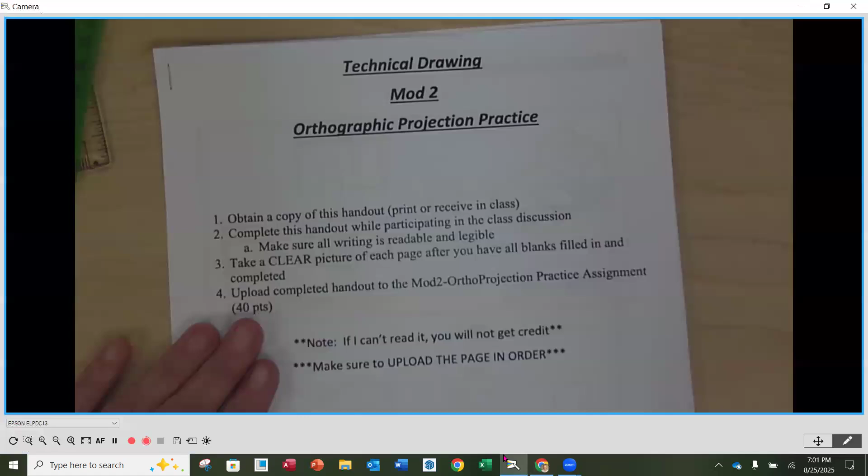So I've already printed the handout here for us. I'm going to go underneath our camera. I forget exactly how many pages it is, but I think it's like 6, 7, or 8 pages or so. Not all of it has work to do on it, don't worry. But we're going to go through and hit the highlights and make sure you know how to proceed and what's expected.

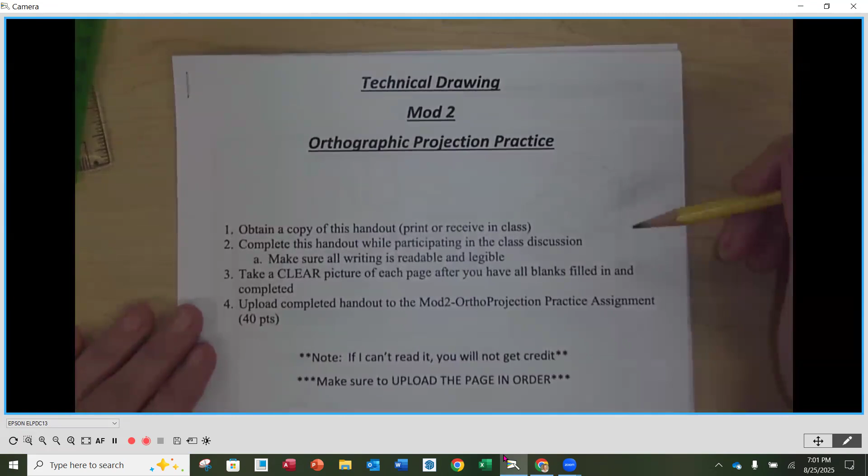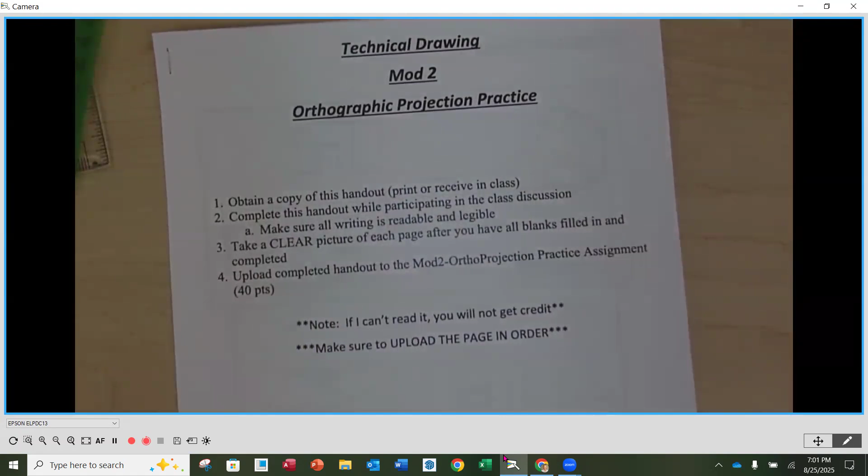So first of all, obtain a copy of this handout. Most of you have, otherwise print it out as needed. If you don't have a printer and you're virtual, once we get to the places here where you need to fill in information, you'll be able to identify it and then number for me. So if you're not here on campus and you don't get a copy, just make sure it's easy for me to follow and I know what you're answering and doing.

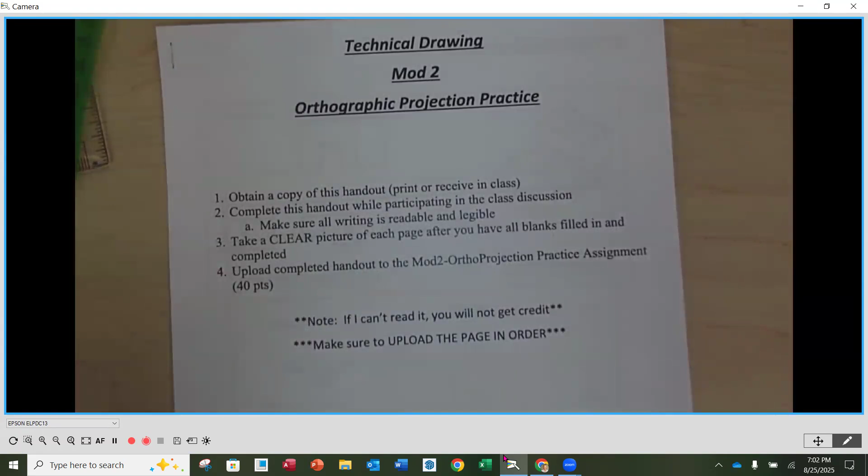When you hand this in, you are going to be uploading it to the assignment. It says here, take a clear picture of each page after you have all the blanks filled in and completed, and that's what you're going to upload. So whether you use a scanner device, a scanner app from your phone, a regular scanner, or you just take the pictures, you can do that, but you have to be directly above, kind of like a copier.

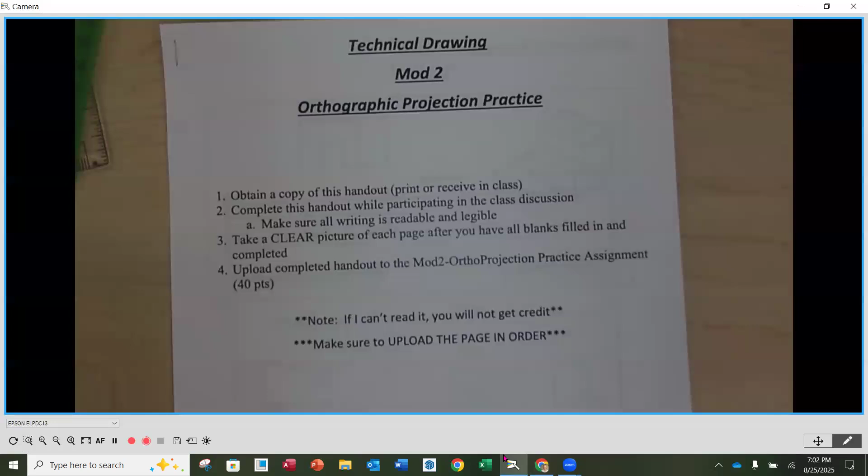You guys ever hand in like that? Okay, and make sure that your files are clear. If you go back and I pull them up and they're blurry because maybe you moved or the lighting wasn't good, I can't give you points. And then you're going to be burning a submission, so always check your files before you hand them in, just to be sure, because if I can't read it, I can't give you credit.

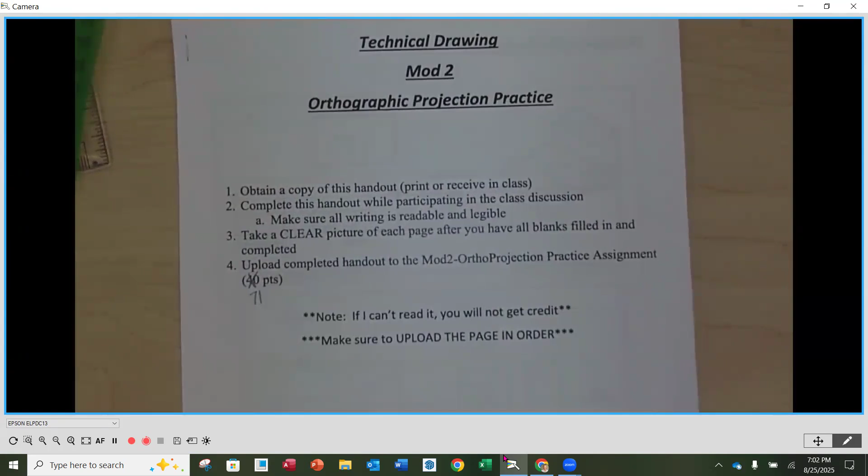And then you're going to upload it, and it's not 40 points, it's actually 71 points. I had it 40 to begin with, but I thought, you know what, it's kind of hard for me to grade that way. So I gave it 71, kind of 1 point for everything that you're going to be handing in.

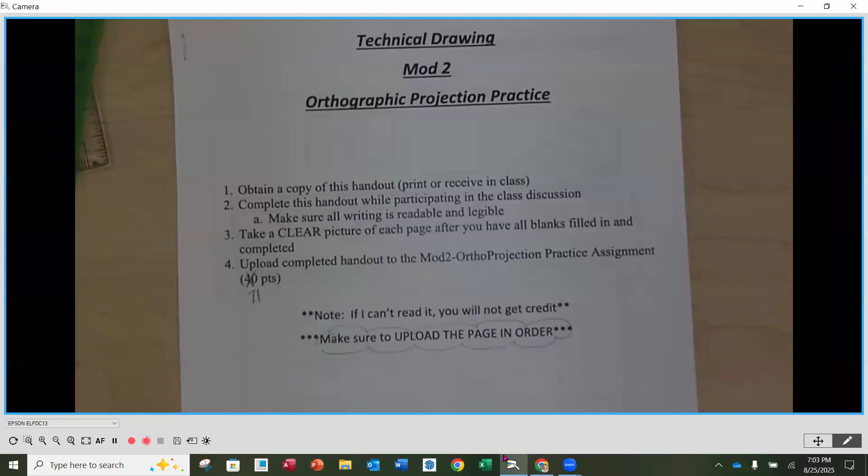The other thing that I appreciate is if you upload in order. If you take it apart and put it in all different orders, you know, if the first page is the last page and stuff like that, believe it or not, from my perspective, it's a pain to go through. So if you can put them in order, I would really appreciate it.

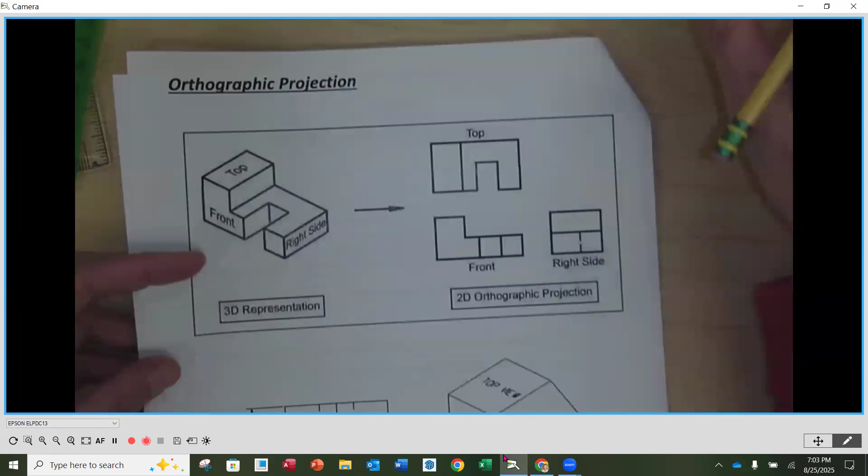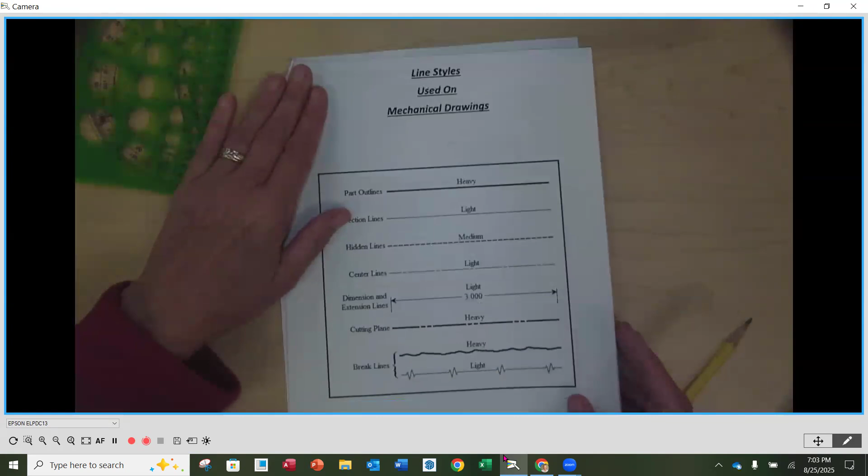Now the first couple of pages here are more reference than anything else. The first one is looking at a 3D representation of a simple part, and then you can see the top, front, and right side views in orthographic projection. Just a nice example. Same thing down here, just another example. This is also a review of the different types of line types found in mechanical drawings. That's for your reference.

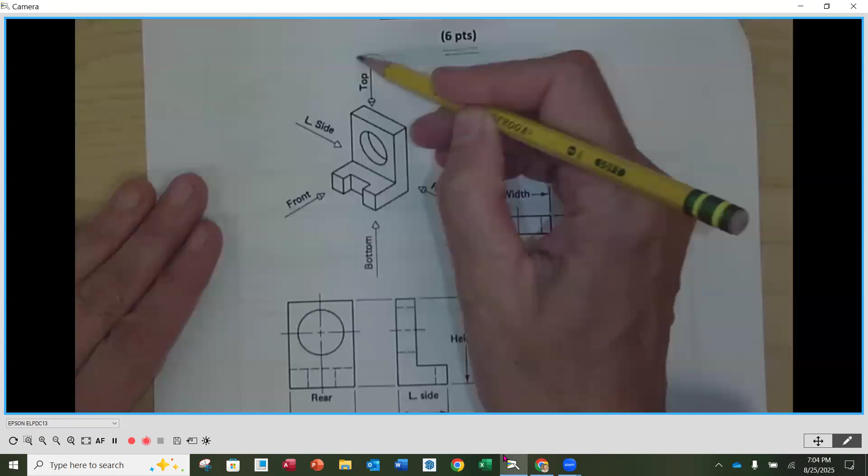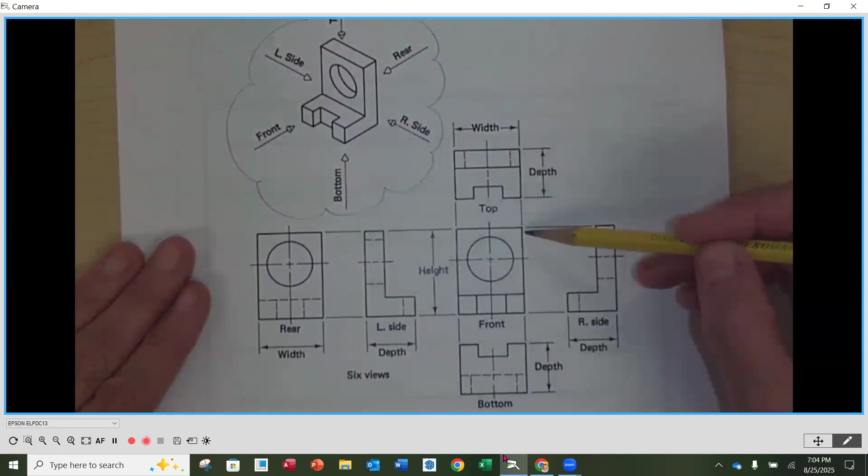And then when we turn the page one more time, this would be like the 4th page-ish. This is our first page where there's points you need to hand in to earn points. In this case, they are using the drawing that we see here. They're identifying the line of sight for the front view, the top, the right side, the left side, the bottom, and the rear. And then they've drawn in orthographic projection, unfolding that glass box around that part to show front view in projection with the top, bottom, right, left, and rear. Do you see how that's developed there?

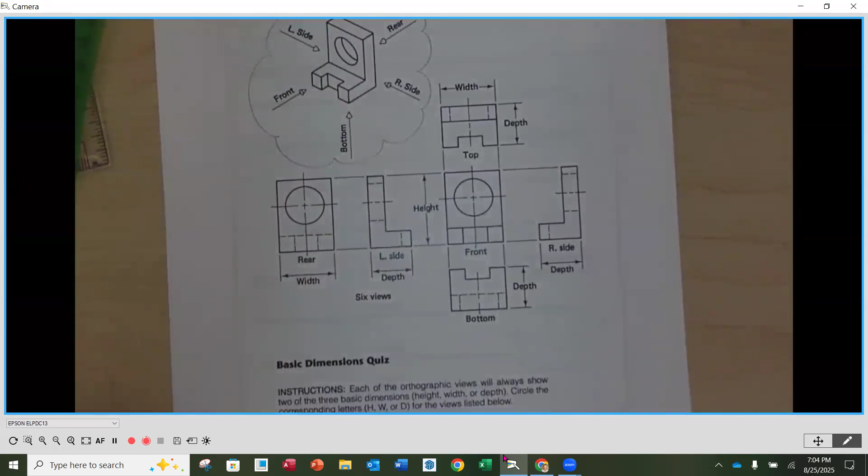Now what they want you to do is identify those 3 overall dimensions, height, width, and depth. As I said earlier, we can find them in 2 views. Each one of these views, 2 of those are going to be identified, not all 3, but 2. So what they want you to do is, at the bottom here...

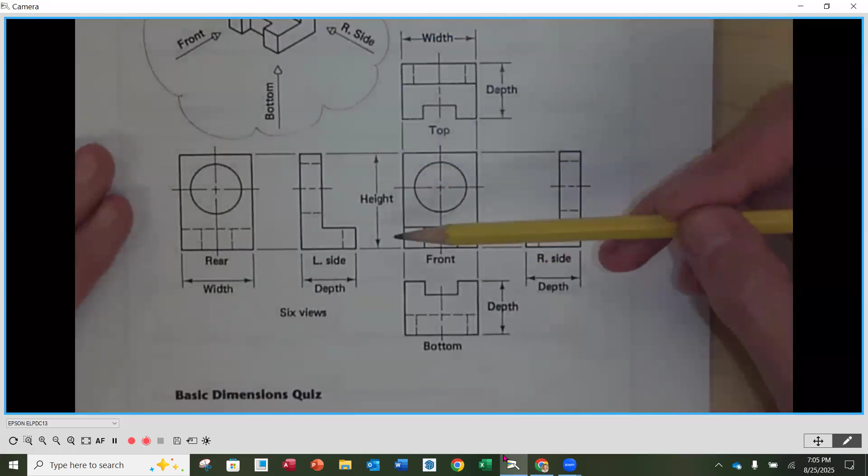Identify in the front view which overall dimensions you see: height, width, and depth. So if we go up here to the front view, which is in the middle, you can see that they identify the height, right? The height is going to be there, so we would circle H as one of them. And then as we look here in the front view, I don't see the width dimension in the front view, but do you notice how width is dimensioned at the top of the top view?

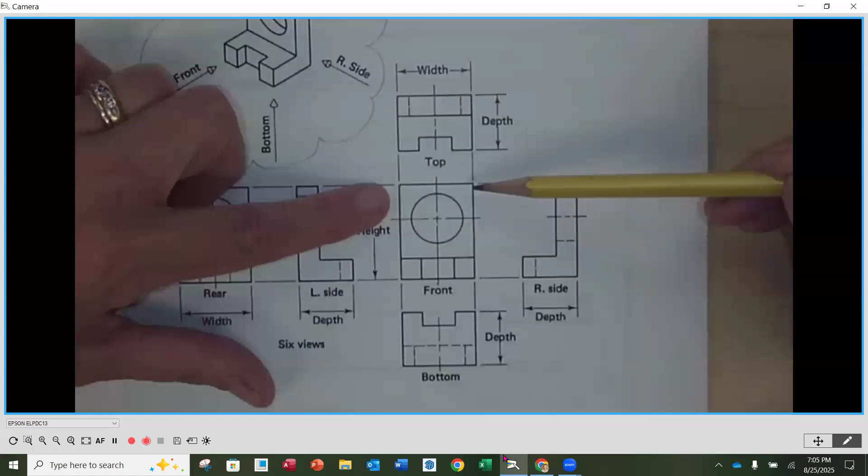And we know that's in projection, so we would get the width dimension also in the front view. Okay, so then you're going to go to the top view, the right side view.

And each one of these, you're going to pick 2 of the 3 that are listed there, referencing back up on the top here. Do you want to do another one together, or do you feel confident? Good, okay.

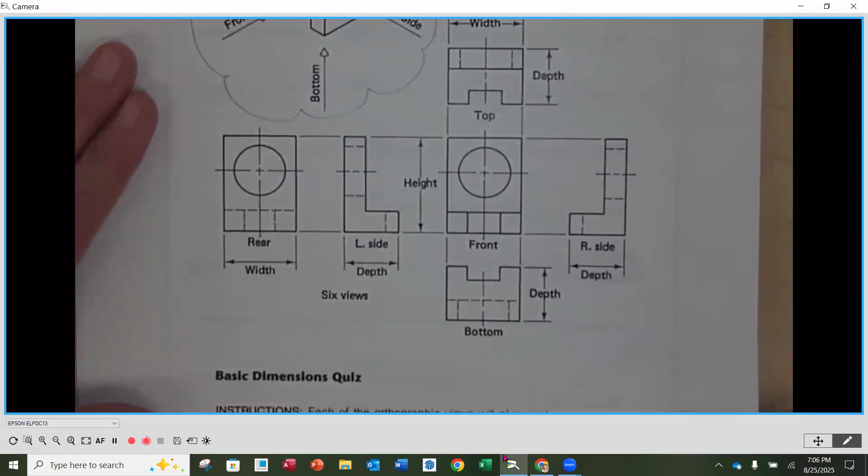So you've got a total of 6 points on that page. All right, the next page, this one's fun.

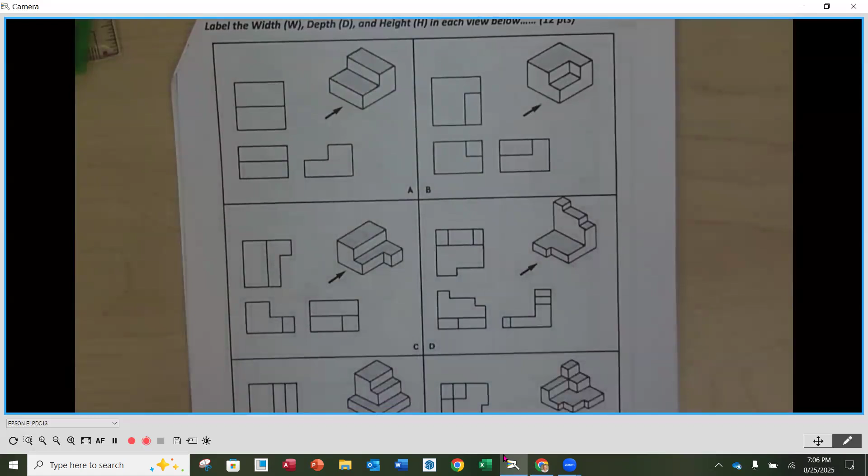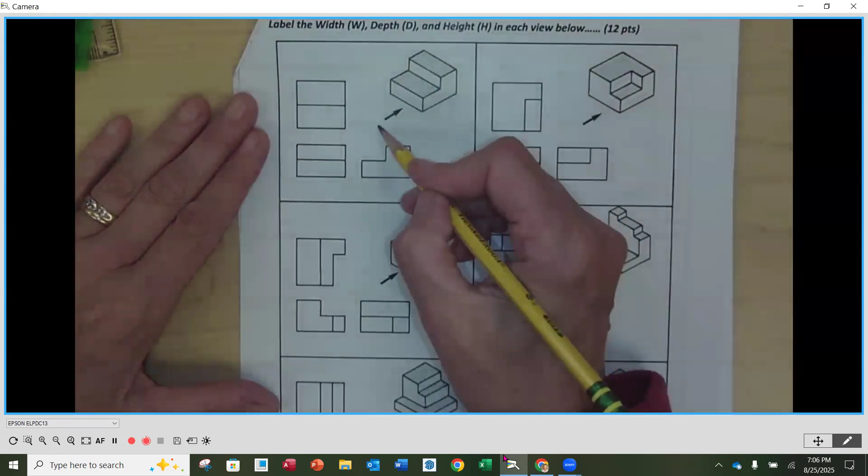You're going to label the width, depth, and height in each one of the views. Now, if we look back to the previous page, the front is always going to be kind of our base. The front is always going to have the height and always going to have the width. So if we look here, of these 3 views, this middle one is going to be your front view. And all you want to do is identify the height dimension, H.

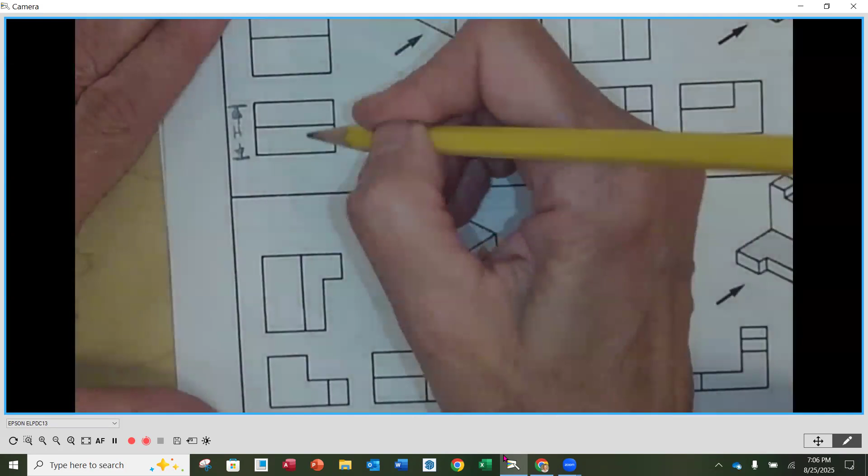Now I'm going to zoom in so you can see. So I'm just putting a little extension line, little arrow, and I'm putting an H in the middle. Do not draw on the part. I'm going to tell you why. That is illegal to the standard.

And then we also have little extension lines here. I'm going to put my little arrows, and in between, I'm going to put D for depth - I'm sorry, no, W for width. I was thinking of my next view, W for width.

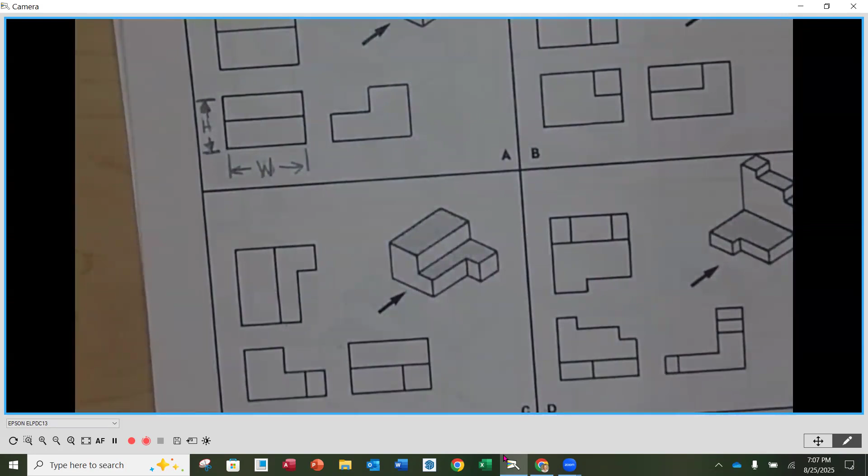Okay, right side view. Right side view, I get height, don't I? H, because it's in line with the front view. What about this dimension here? This is my depth, right?

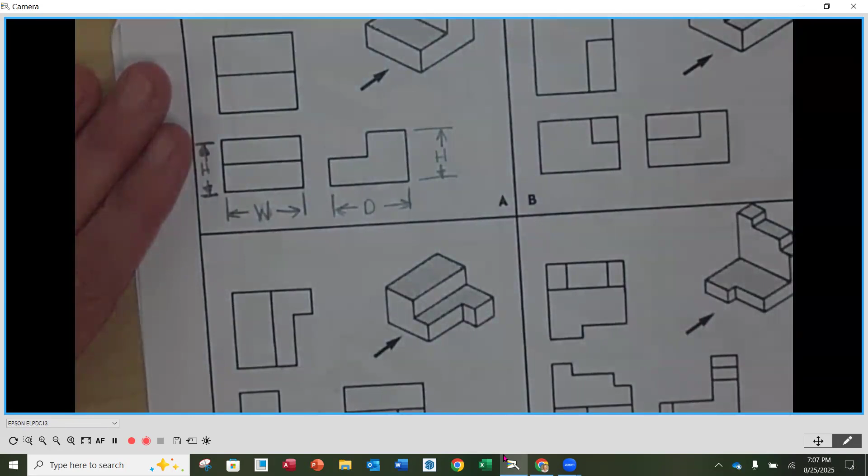And then if I go to the top, remember we're sketching, so it's going to be relatively neat. The width is going to be the horizontal dimension across the top. And then as we look here, this dimension going back is our depth, right?

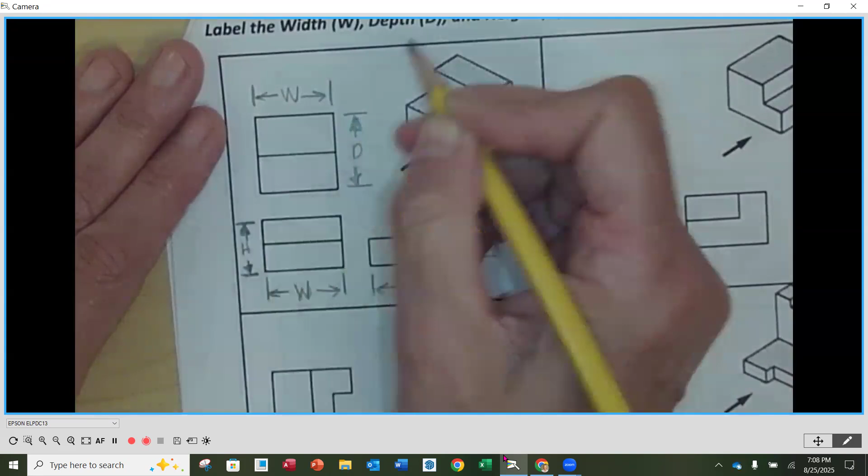Now, something I do not want to see - notice I put arrowheads on each one of my dimension lines. I do not want to see like this, W, and lines like that. That is illegal. Every dimension needs dimension lines.

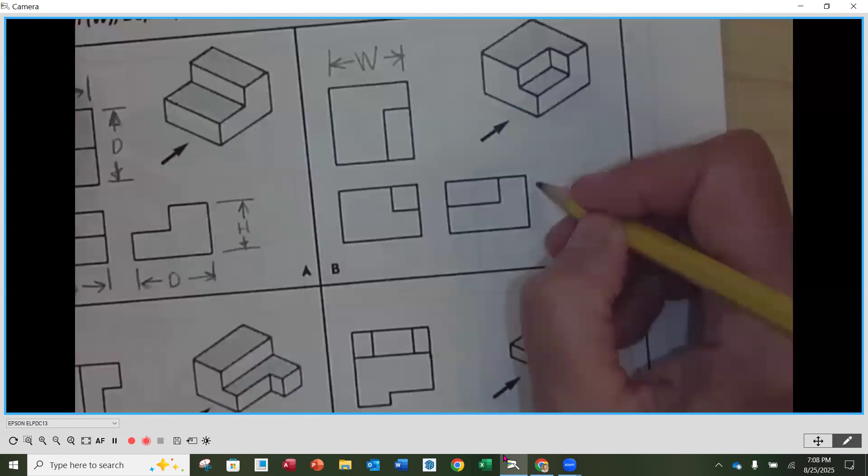Every dimension line has an arrow. So this is going to be arrows. I don't want somebody to put on the side over here, H. No, well, where does the H go to? Extension lines, dimension lines with arrows. Make sense?

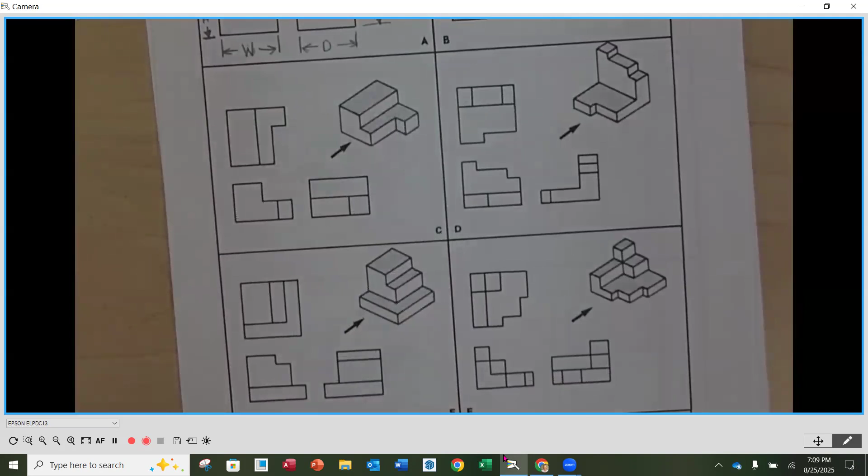Okay, you don't have to use a straight edge on this. Again, you can kind of see I was kind of putting them in, but as long as I can see them. So you are going to go through, you have 6 of these to do. Overall height, width, and depth on each one of them. And that's 12 points total on that page.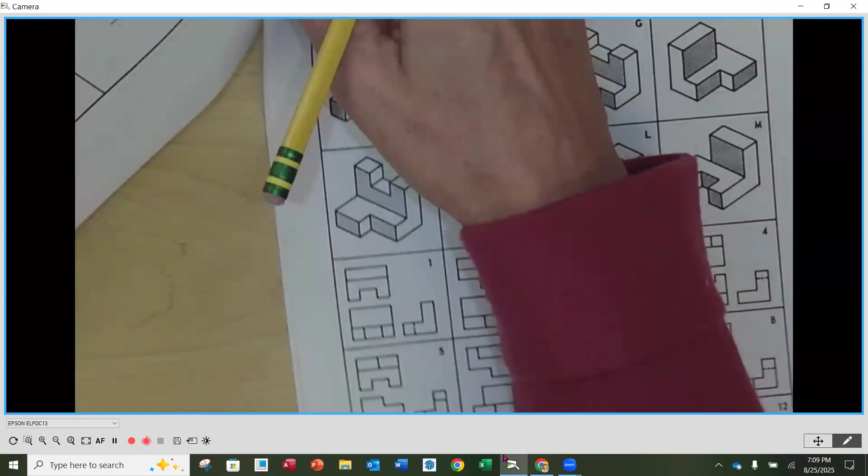Turning the page, I'll let you finish that later. So good, it's one of my favorites - second favorite. And next, my favorite's coming.

This one, you want to sketch each view of the parts below. There are 3 parts, you're going to get 3 points each. You're going to have a front view, and they're showing you the line of sight. This is going to be your front view line of sight, for each one of these.

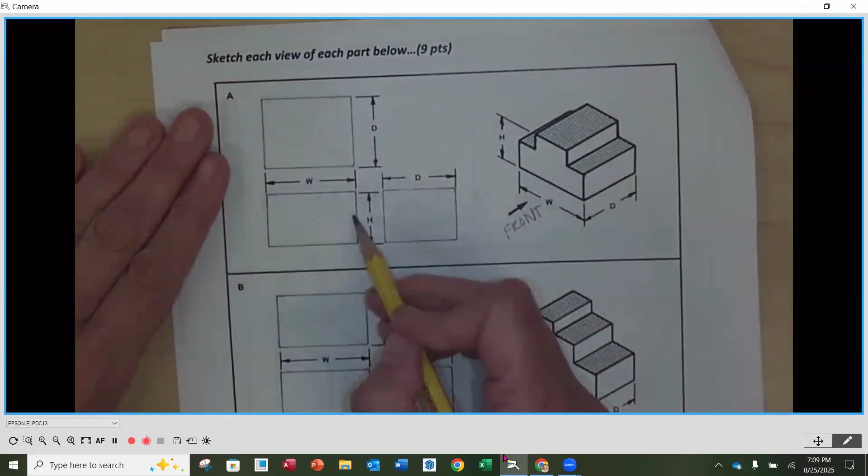So that means this view right here in the middle is going to be what you see straight on, front view. Then you're going to do a top view and a right side view. This is where I'm going to strongly encourage you to use a straight edge.

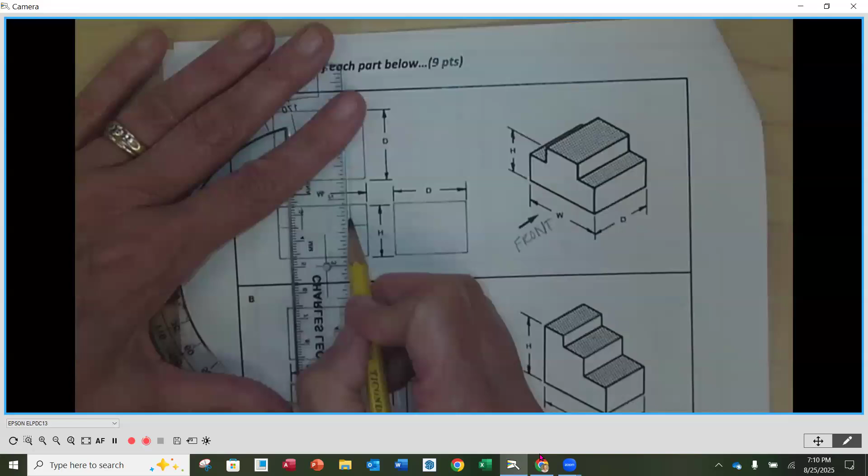So for instance, as I look here, if I look straight on, I'm going to have about here, about here. That's going to be my front view. And I want to darken those in so I can depict that these are my visible lines.

So you're going to go all the way around, and you're going to make sure that I can see that these are visible lines for the outside. Does that make sense to everybody? Okay, then what you're going to do, that's my front view.

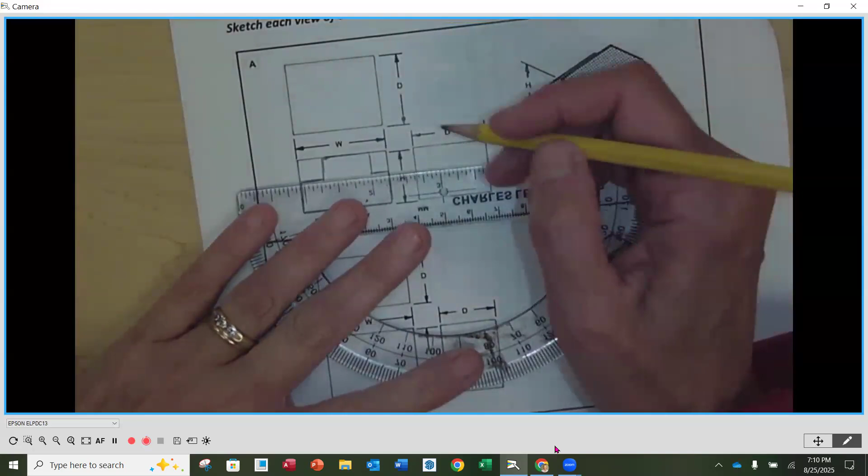So now over on the right side, I've got to draw what that would look like. So that would be looking in this direction. And then it would be visible lines, I would darken these in all the way around.

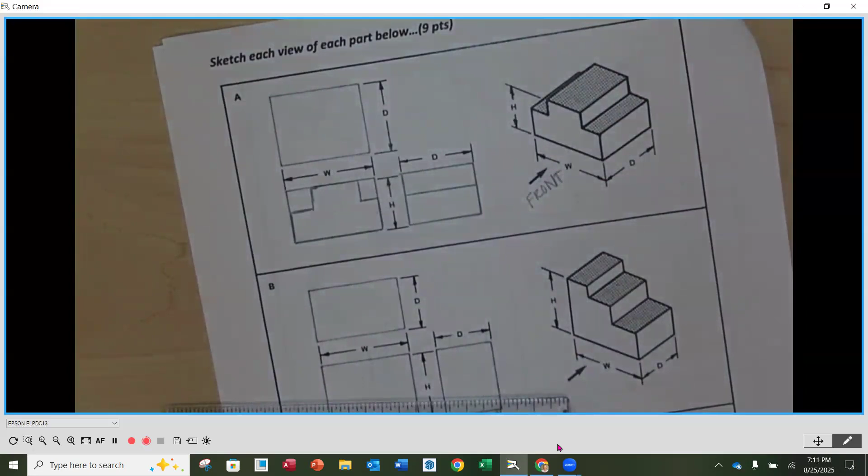So you don't have to have a protractor, you don't have to have a ruler, just a straight edge. You could even use the edge of your notebook for the straight edge. Does that make sense? And I can grab some extras if anybody needs them.

Then we're going to do our top view. We have to make sure that this is in line across the top view.

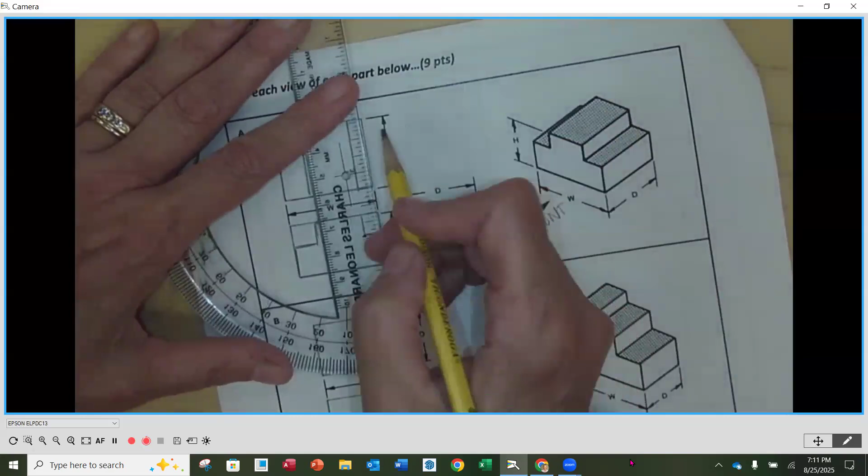And then this is going to be what that looks like. Now they've already dimensioned for us our W's, our H's, and our D's. You don't have to do that. You're just going to fill in the insides of each one of those views.

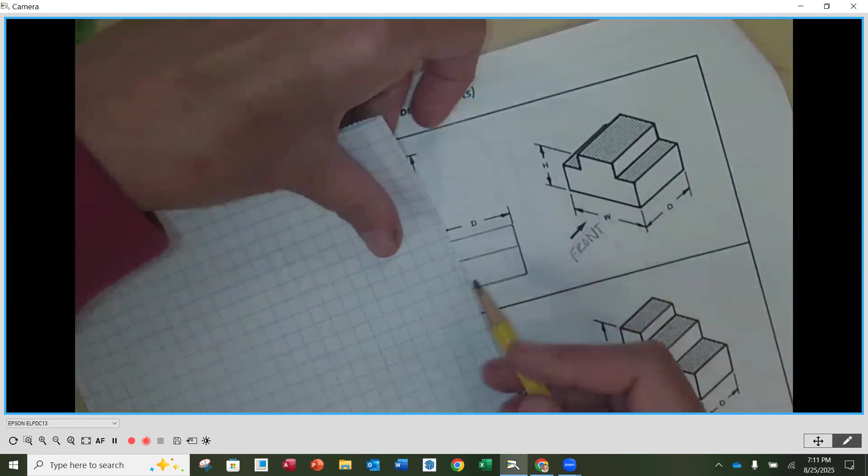That makes sense? I have a couple straight edges here. You can borrow mine. I'm going to go back and get some more straight edges for anybody in the class that wants to use them. But again, you could fold over paper and this can be a straight edge. You don't have to get anything super formal.

So you're going to finish up, you're going to do the 3 views for the middle steps and then the 3 views for part C. So I'll have you finish that up during our lab time.

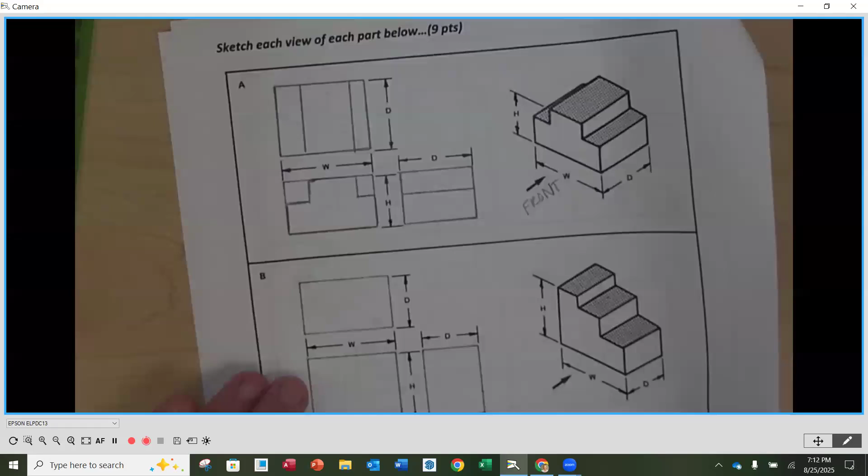Turning the page. This one's my favorite page. What you have is on the top, you have pictorials. On the bottom, you have 3 views. You need to match up the pictorial to the view down at the bottom.

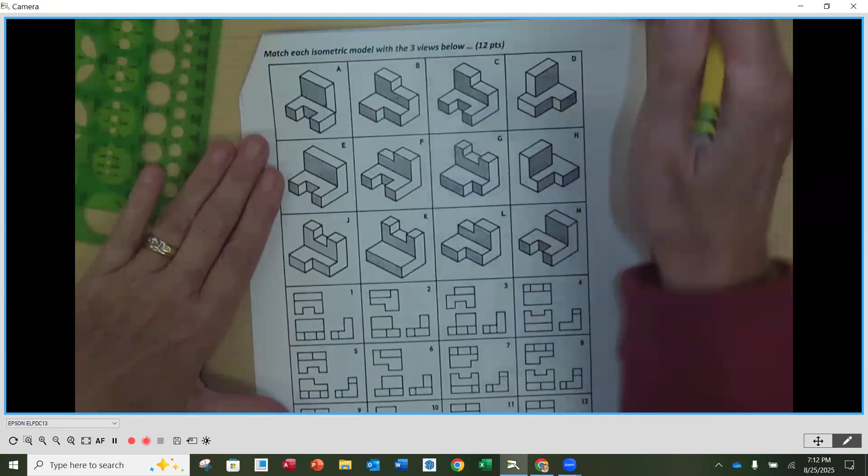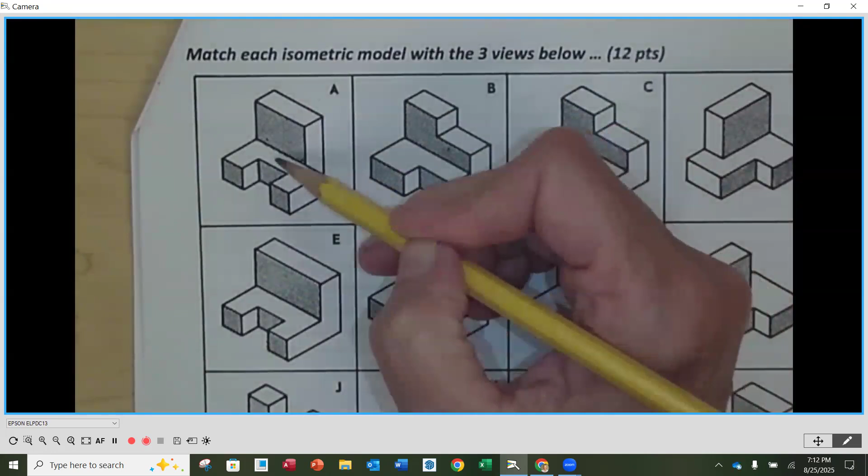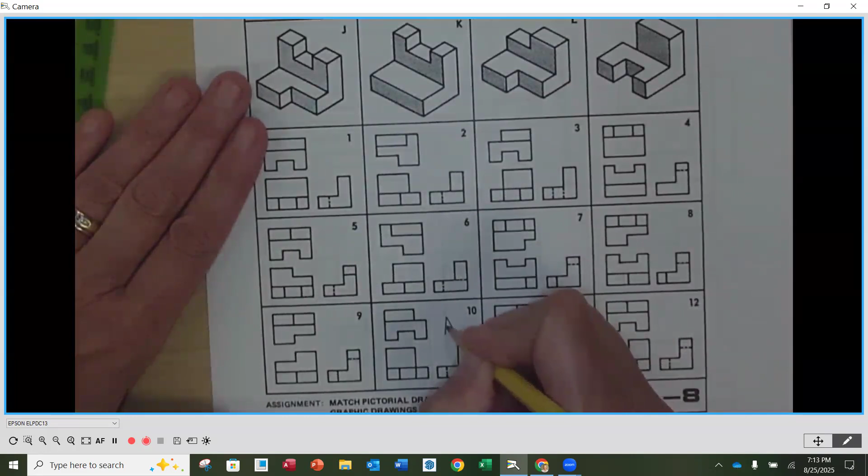So A looks like that. Has anybody found it yet? Does anybody see it? Deborah, do you see it? 10. Anybody else? I'm seeing, yep, 10. Okay, so what I want you to do here, down at 10, you're going to put your letter with a circle around it. So I'll look at this part to make sure that it's the right ones. So number 10 is A.

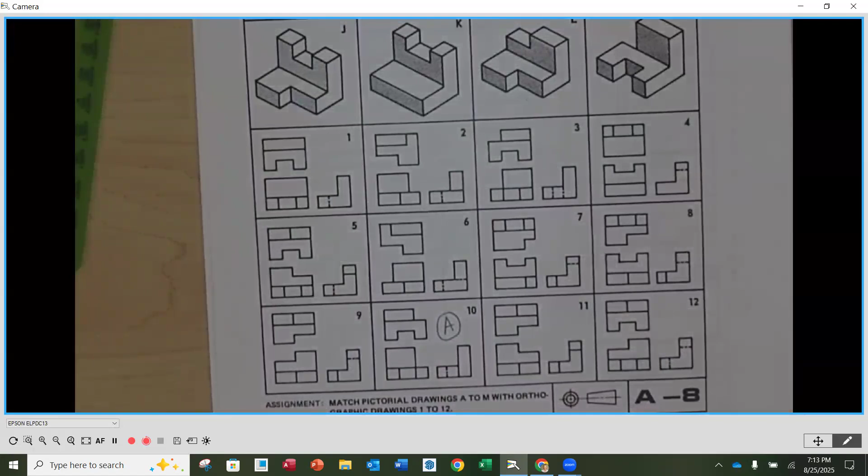And you're going to do that very same thing through M. Find the corresponding 3 views. That one's kind of fun. I think that one's really fun because sometimes you get to the end and you're like, oh, I must have got a wrong one, and that's okay. It's kind of fun, a little challenge.

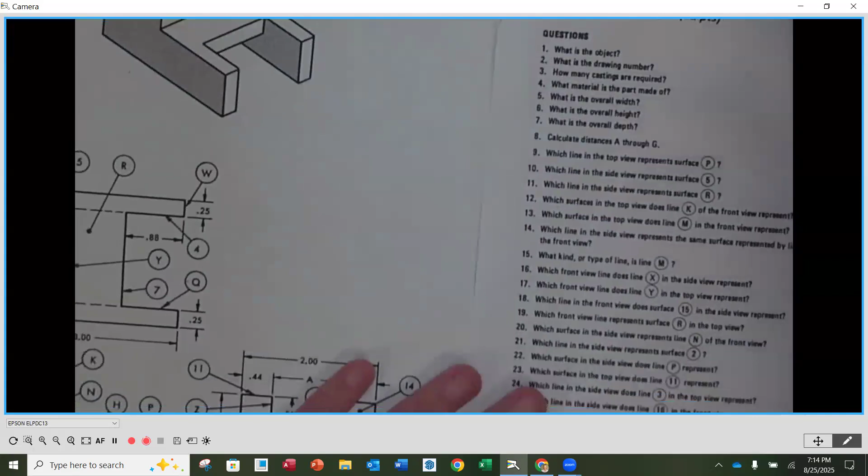Now, the last exercise, I'm going to pull my paper apart here. You don't have to if you don't want to. These 2 pages go together. So the left side is a pictorial, and it's 3 views: front, top, right side views.

And then you're going to notice that on each one of those views, we've got some dimensions, but we also have letters and numbers that are balloons that are pointing to different things. Those are going to correspond to the different items that they're asking for here. Not all of them, but some of them.

Now, the title block is going to have information about the part, and those are the first questions that you see here. So what is the object? We look to the title block. It's a feed hopper, right? Okay, so that's going to be your answer here.

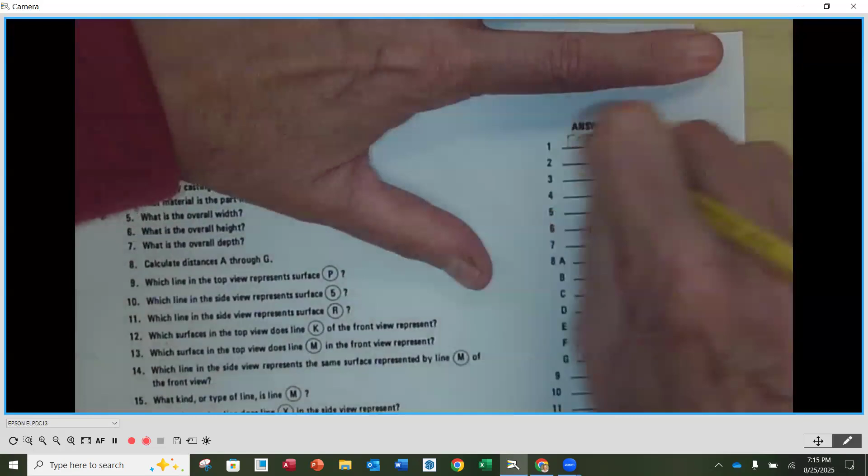Feed hopper. Now, when you do this, I'm not being very neat because I'm sitting here like this. You need to write so that I can legibly see what you're writing. If you have to come up here and tell me, well, that's an S, not a 5, I can't give you points. Okay, so take your time.

If you know that you're not a really good penmanship person, you're just going to have to take your time or write them out in Word, number them 1 through 26, and then hand that in. Does that make sense, everybody? Okay, the next one is, what is the drawing number?

Drawing number is A-11. Okay, so you're going to notice that those first couple questions, 1 through 4, are going to really pertain to that title block. So I'll let you fill that in.

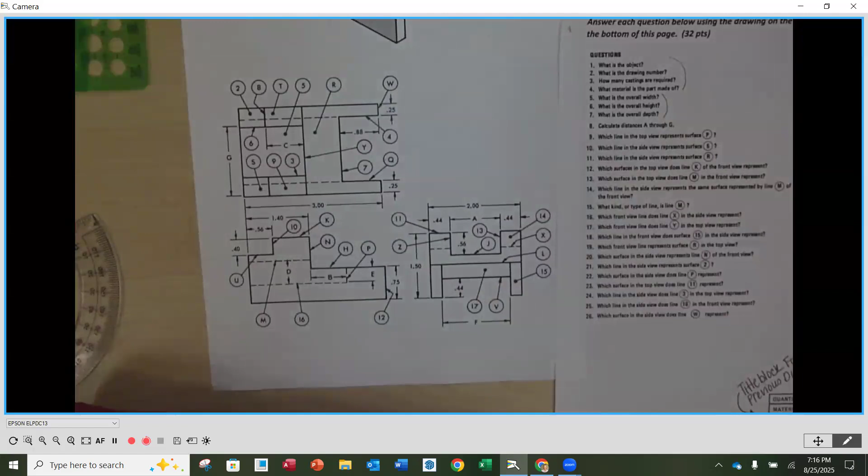Now, the next 3 are: what is the overall width? What's the overall height? What's the overall depth? And you're going to go back to the drawings over here, and you got a lot of practice on the previous pages. Where do you find your height? Where do you find your depth? Where do you find your width? And now you're going to locate it here. Does that make sense to everybody? You're going to put those numbers into 5, 6, and 7.

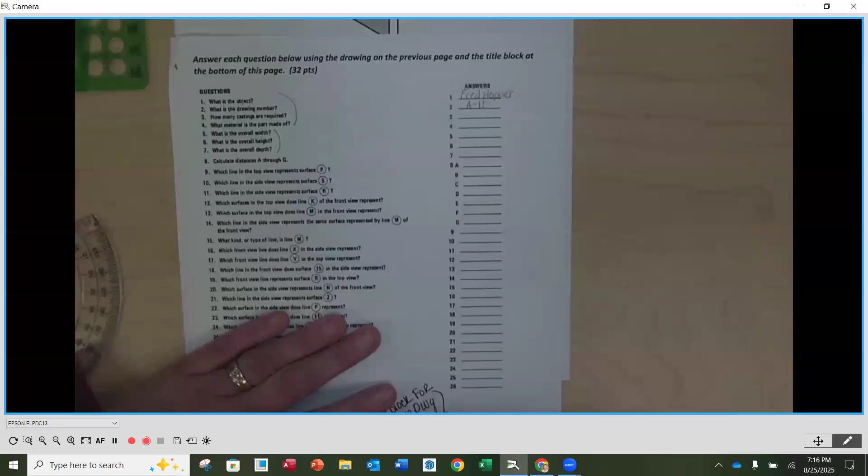Then the rest of the questions deal with calculating distances, for instance A through G for number 8. So A through G, that's all number 8. That means we're going to find A on the drawing. Let's go over here and find where A is.

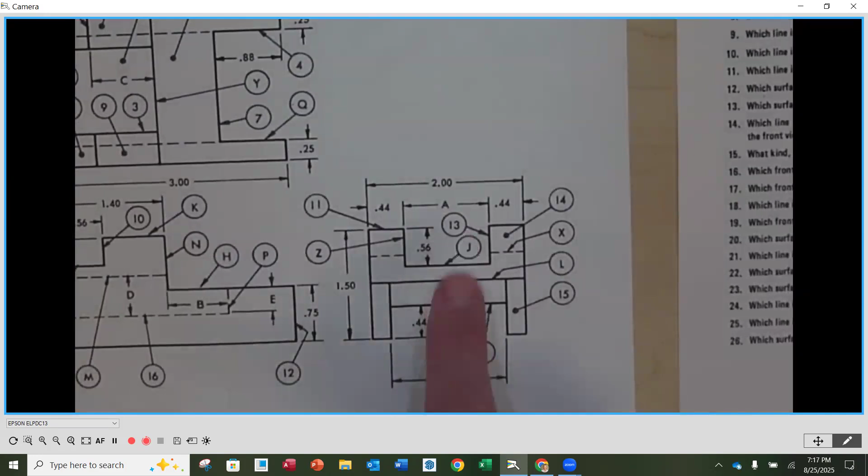A is in the right side view, and it's this dimension right here between the two uprights, the difference between that cutout there. So you know that the overall width, actually depth, is 2 inches. You're going to subtract off 0.44, and again subtract 0.44, and A is left over. So you're going to put that number right here for 8A. Does that make sense?

Then you're going to find dimension B, where that one is. Here's C, B is right here. So you're going to have to look maybe on different views.

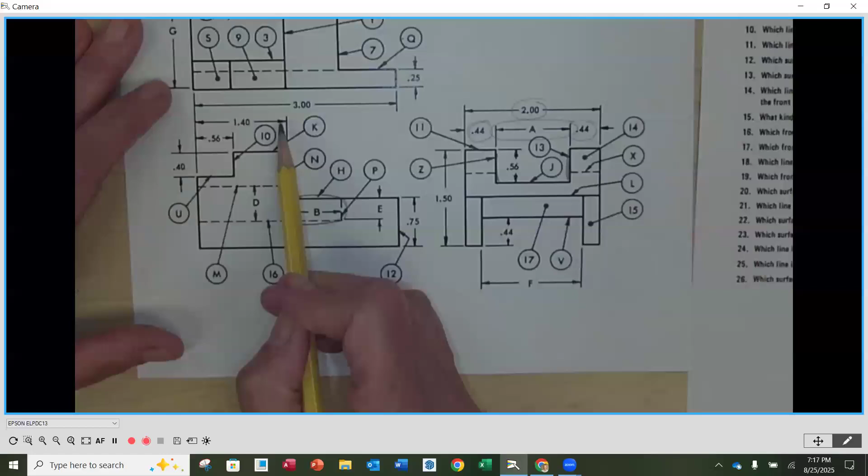You're going to look up here. You know that this is overall 3. You know that 1.4 goes to this line, and you know that 0.88 from the top view goes to this. So it would be 3 minus 1.4 minus 0.88, and that's going to equal B. You see how that's in line here? Yeah, so that's the number you put for B.

And then you're going to find C, D, E, F, and G. You're going to continue and answer the questions that you see there. They're all a little bit different.

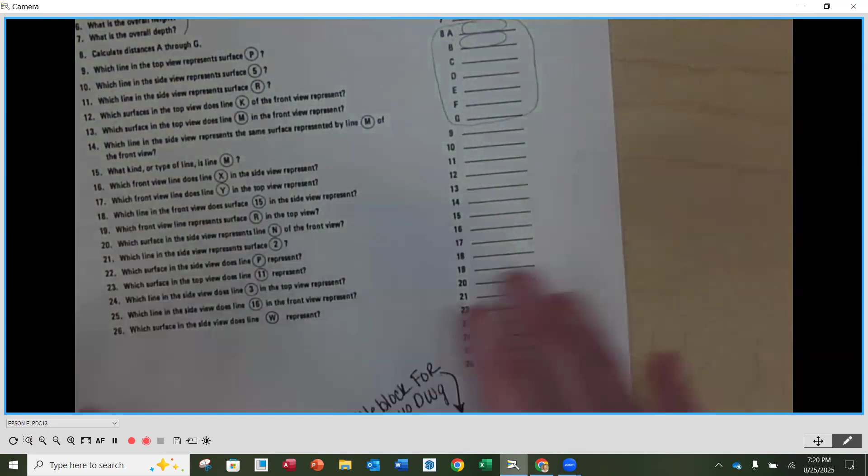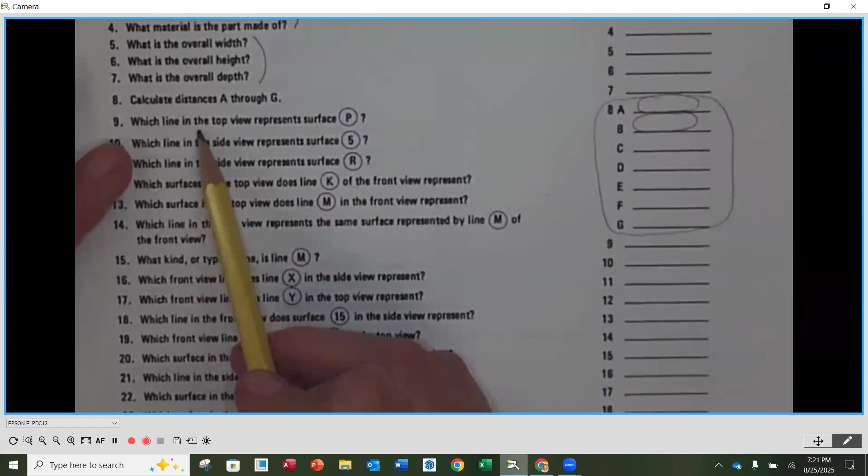Yes, questions for the last one? Which line does this represent, or whatever? Are you looking for like the name of the line itself or the... So you said it says, for instance, like number 9, which line in the top view represents surface P? So if we go, it says which line in the top view represents surface P.

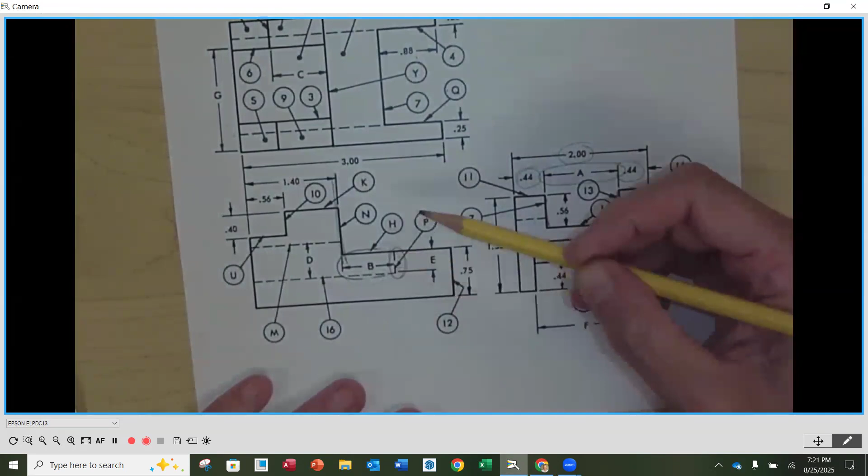We have to first find surface P. So surface P is this surface right here, this line that we see here. So if this is a surface here, here's P, it's pointing to it. We go up into the top view, this is the line representing it. Is there something that's calling out that line? Number 7, right? Yep, so you would put number 7 for number 9.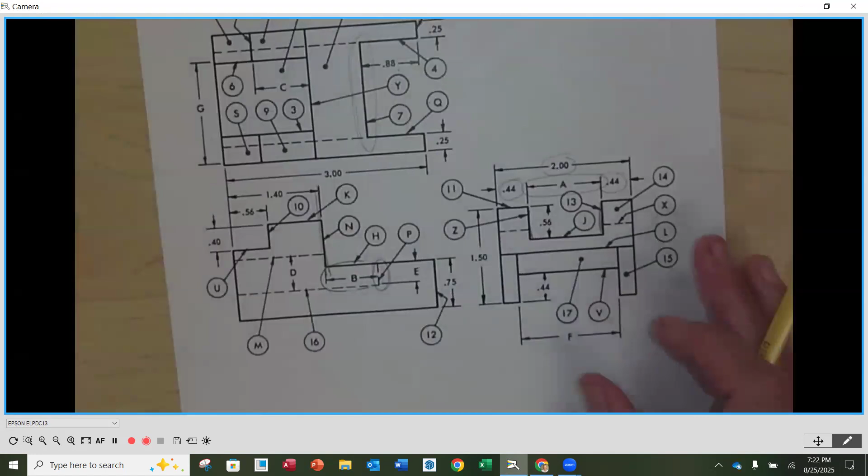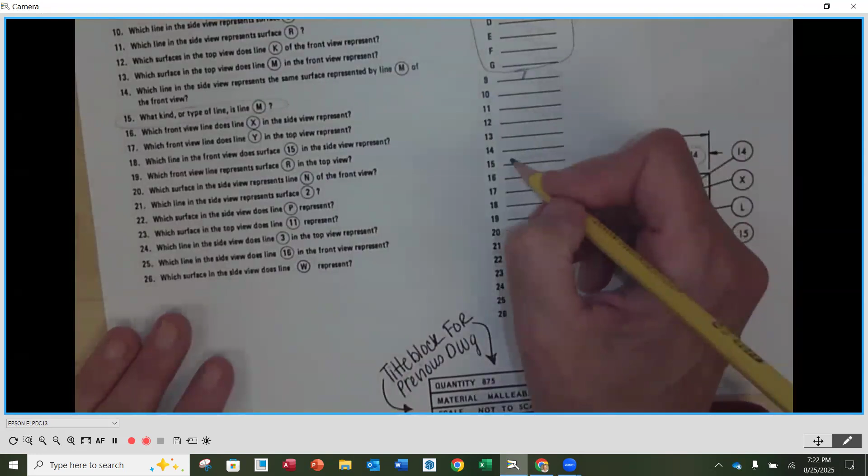Here's what I'm just kind of looking at. Number 15, it says what kind or type of line is line M? So we want to find where M is. M is right here in the front view, and it's pointing at a dashed line. What type of a line is that? Hidden line. Yeah, so then you're going to call that a hidden line. You're going to say for number 15 that's a hidden line. Yeah, good, thank you for asking that.

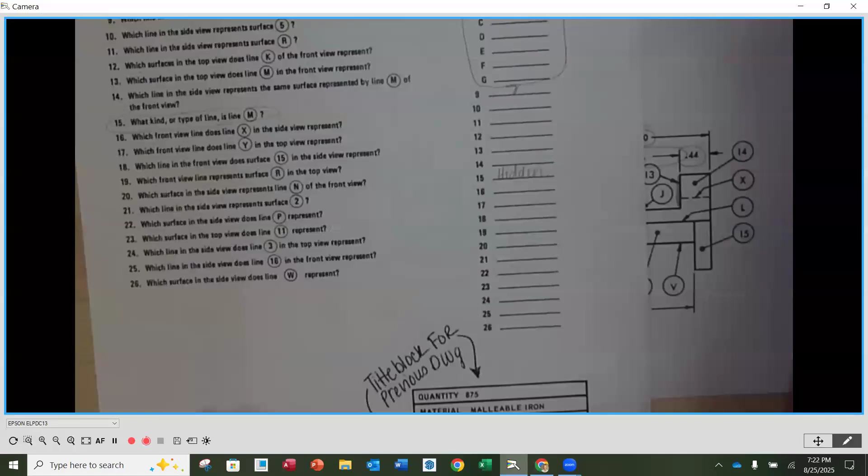And if anything comes up along the way as you're working, that's what I'm here for, if you need clarification or anything like that. So I'm going to let you work the rest of the time that we're together, and it would be a good time to get going on this. And if you need to finish anything up from module 1, it's a good time to do that as well.